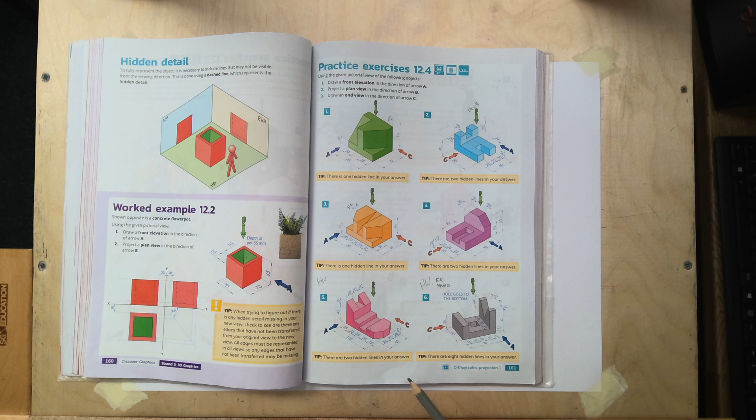Okay, so our usual here now, we're going to pop in our X and Y. Now, the question is looking in from the left, so A is going over here on the right. B, the plan, is always below A, so therefore C is what's left over here, alright? And our empty box then, that's our 45 degrees.

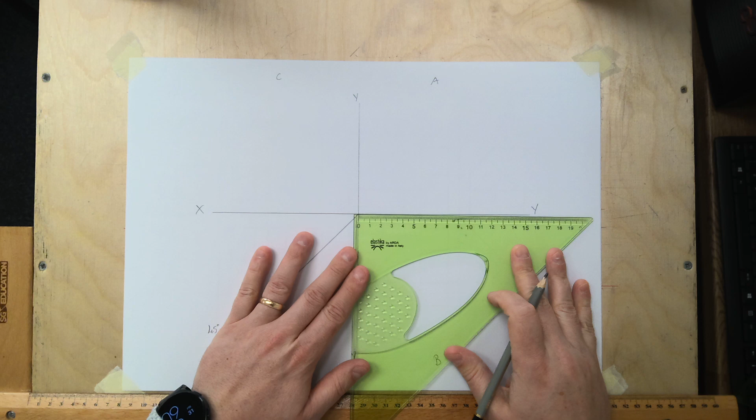Now, starting with our elevation, space of 10 millimeters away. As I said before, speeding things up, when you get a vertical height, you go up and down. Two lines drawn in for both views, done straight away. Overall length here is 110 millimeters. Same thing again, you're going to bring it up and down. One movement, job done. We have our full widths done for A and B.

Now, a couple of measurements along this: we have 25, 20, 25, 25, and you're left with 15 then, okay? Same thing again, just going to take our heights and bring them up and down. Everything's nice and light, so it doesn't matter if there's lines all over the place. Once you start heavying in, it'll all start to fade away.

Now, our overall height here, we've a couple of heights going on. So we have 45, and then a 20 on top of that. And we have our horizontal heights. We're going to send them over in both, because we're going to use them over here in our end view. And then our front over here is 20 up. It just speeds the whole process when you start to draw this in.

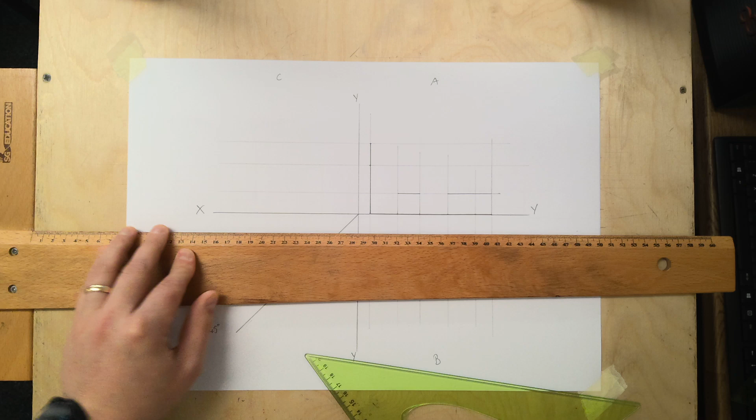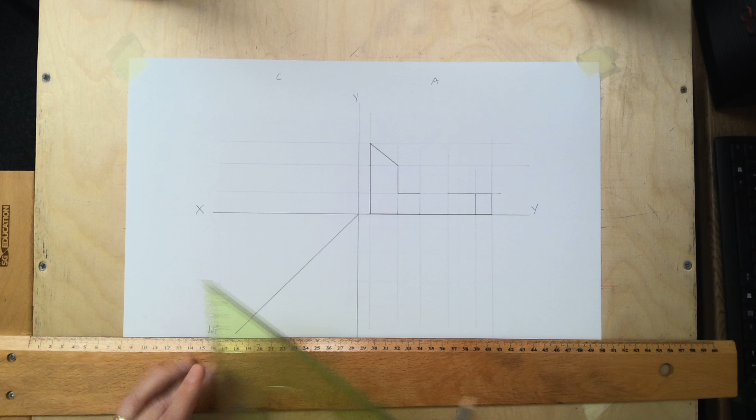Okay, now we'll start drawing in. Again, looking in from the left. We'll start to slowly create our shape. So I'm just joining up the lines, looking at the picture, working with everything. We have a little drop down here, a little trench going through there, and that is down 10 millimeters. We're going to send it over into the other one. Oh, slip this in, it's going there, sorry. That is our elevation.

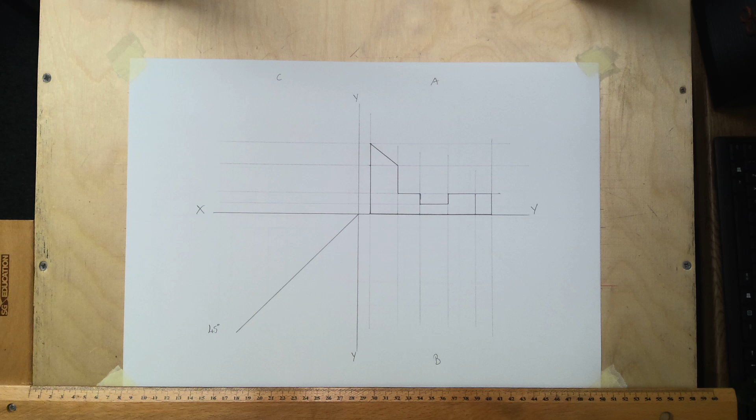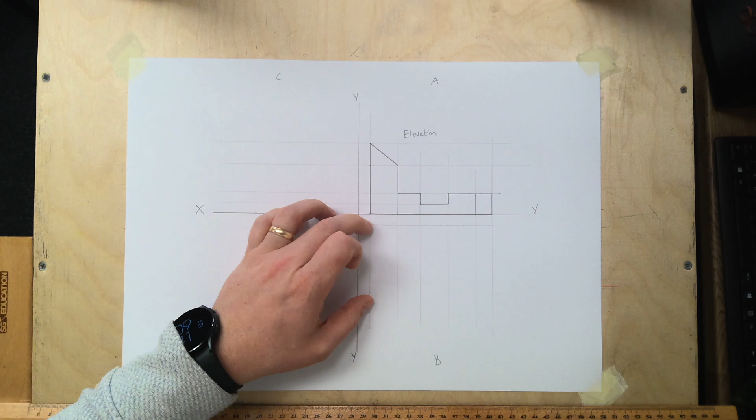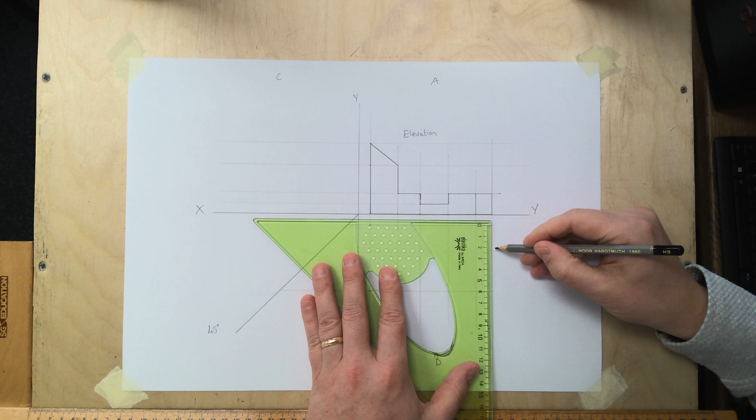We'll jump into plan next. So down 10 millimeters, giving a little bit of spacing, it stops everything being cluttered. When we bring across these horizontals, we bring them over till they hit that 45 degree line. The width of B is always going to be the same width as C. So that is 60. Now, over here we have a couple of measurements: 20, 20, and 20, which is on the front. Take that height, bring it across.

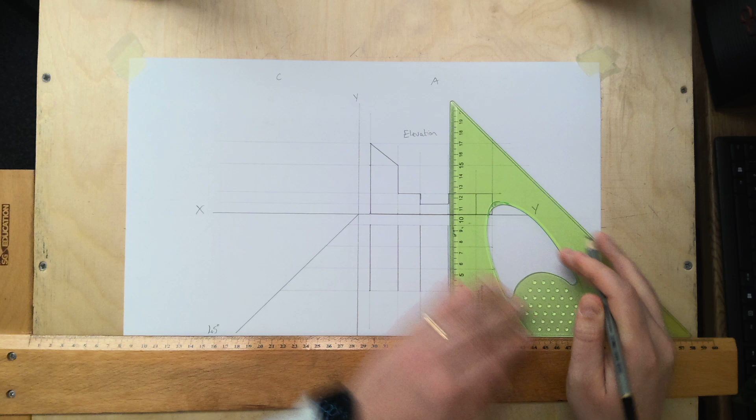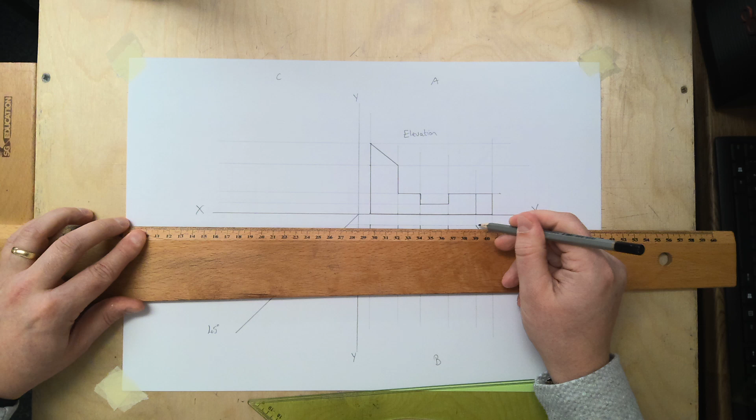That's it then. Just joining it up now, creating our shape. This is the beauty of having already brought down our vertical lines, it just makes things much faster. Finally, up top here, there's a little piece passing through. So two outside slopes, inside is going to be flat. That is our plan.

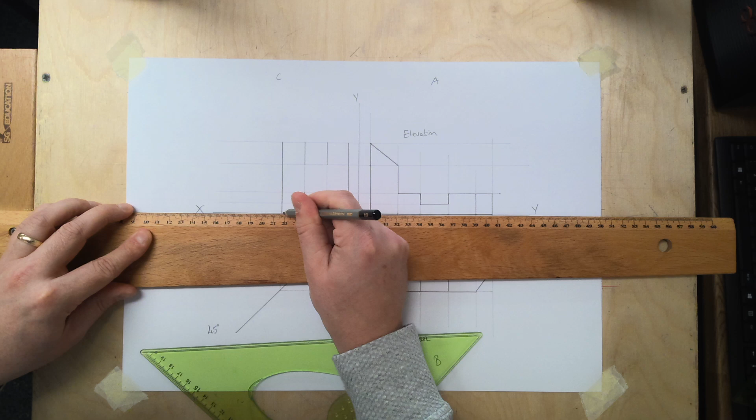Now everything that's hitting our 45-degree line, we are just projecting vertically up. So we've everything here we need. We just need to heavy them in. That is our end view, going to be heavied in now. Vertical heights first, vertical portions there. It's an end view. Now this whole object isn't actually completed yet.

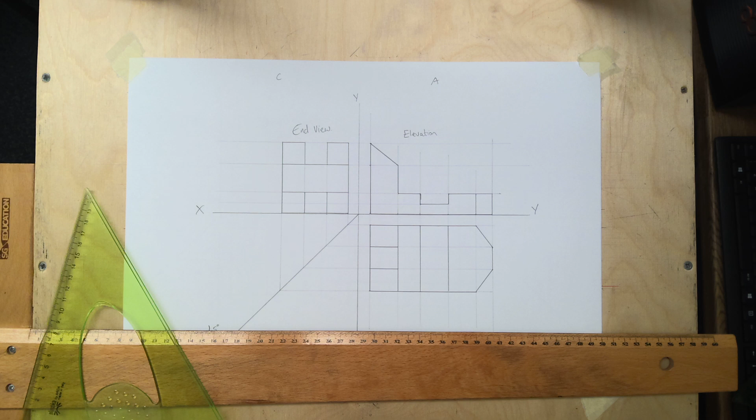There's two things missing from it, and that is our hidden detail. Hidden detail is representing information that is seen in two views and not seen in the other view. So we have a portion chopped out here, as a horizontal line. We can see where it starts and ends, but we can't see it up in elevation. This is our width, this is the bottom part, so it must be there, and we must represent that with a dotted line.

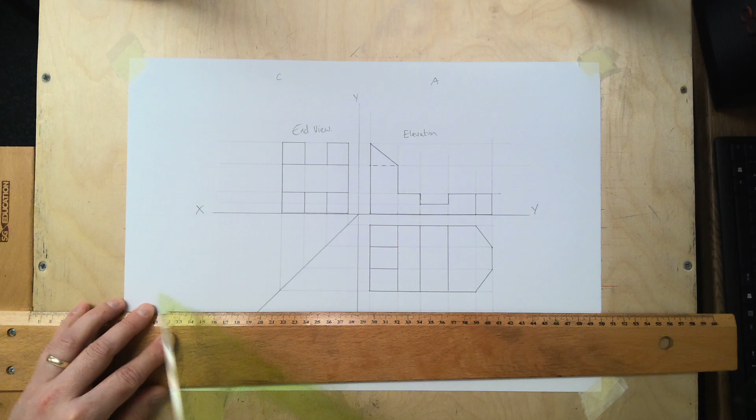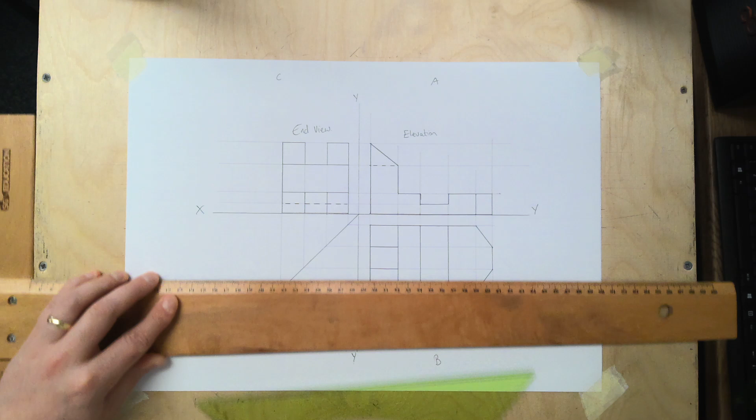Same thing again, we have a trench taken out in elevation. We can see how wide the trench is and how deep it is, but we can't see it over there. We have the width of it brought around and up. The depth is what's missing. So this trench as well goes the whole way through, start to finish. That is page 161, question 5 of the orthographic.